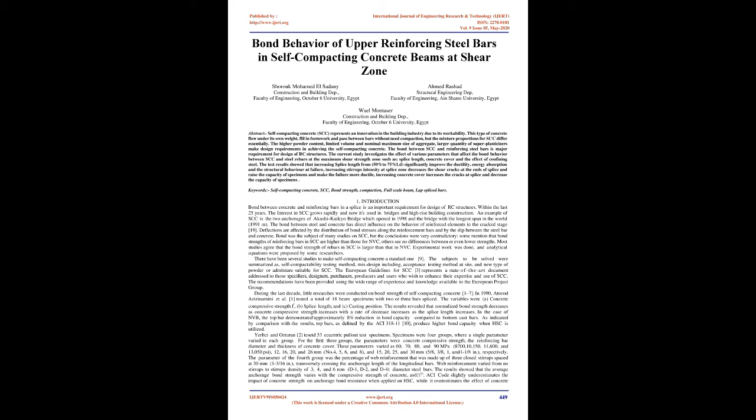The bond between steel and concrete has direct influence on the behavior of reinforced elements in the cracked stage. Deflections are affected by the distribution of bond stresses along the reinforcement bars and by the slip between the steel bar and concrete. Bond was the subject of many studies on SCC, but the conclusions were very contradictory.

Some mention that bond strengths of reinforcing bars in SCC are higher than those for NVC, others see no differences between or even lower strengths. Most studies agree that the bond strength of rebars in SCC is larger than that in NVC. Experimental work was done, and analytical equations were proposed by some researchers.

There have been several studies to make self-compacting concrete a standard. The subjects to be solved were summarized as self-compactability testing method, mix design including acceptance testing method at site, and new type of powder or admixture suitable for SCC.

The European Guidelines for SCC represent a state-of-the-art document addressed to those specifiers, designers, purchasers, producers, and users who wish to enhance their expertise and use of SCC. The recommendations have been provided using the wide range of experience and knowledge available to the European Project Group. During the last decade, little research was conducted on bond strength of self-compacting concrete.

In 1990, Azizinamini et al. tested a total of 18 beam specimens with 2 or 3 bars spliced. The variables were a. concrete compressive strength, b. splice length, and c. casting position. The results revealed that normalized bond strength decreases as concrete compressive strength increases, with the rate of decrease increasing as the splice length increases.

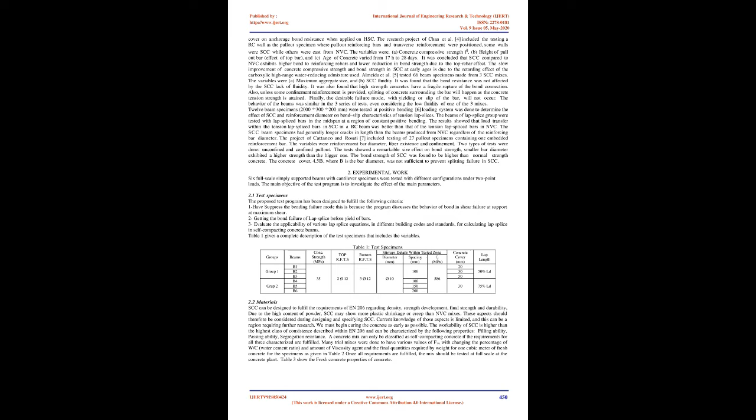In the case of NVB, the top bar demonstrated approximately 8% reduction in bond capacity compared to bottom cast bars. As indicated by comparison with the results, top bars, as defined by the ACI 318-11, produce higher bond capacity when HSC is utilized.

Yerlici and Ozturan tested 53 eccentric pull-out test specimens. Specimens were 4 groups, where a single parameter varied in each group. For the first 3 groups, the parameters were concrete compressive strength, the reinforcing bar diameter and thickness of concrete cover.

These parameters varied as 60, 70, 80, and 90 MPa (8700, 10150, 11600, and 13050 psi); 12, 16, 20, and 26 mm (number 4, 5, 6, and 8); and 15, 20, 25, and 30 mm (5/8, 3/4, 1, and 1-1/8 in), respectively.

The parameter of the fourth group was the percentage of web reinforcement that was made up of 3 closed stirrups spaced at 30 mm, 1-3/16 inches, transversely crossing the anchorage length of the longitudinal bars.

Web reinforcement varied from no stirrups to stirrups density of 3, 4, and 6 mm, D1, D2, and D4, diameter steel bars. The results showed that the average anchorage bond strength varies with the compressive strength of concrete, as f'c^2/3. ACI code slightly underestimates the impact of concrete strength on anchorage bond resistance when applied on HSC, while it overestimates the effect of concrete cover on anchorage bond resistance when applied on HSC.

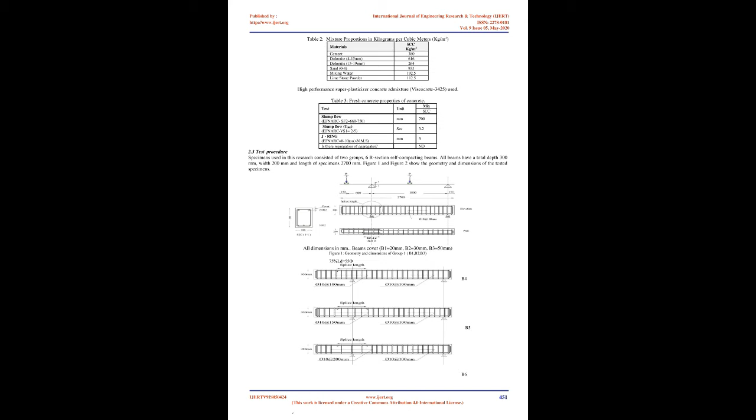The research project of Chan et al. included the testing of an RC wall as the pull-out specimen where pull-out reinforcing bars and transverse reinforcement were positioned. Some walls were SCC while others were cast from NVC. The variables were: a. concrete compressive strength f'c, b. height of pull-out bar, effect of top bar, and c. age of concrete, varied from 17 hours to 28 days.

It was concluded that SCC compared to NVC exhibits higher bond to reinforcing rebars and lower reduction in bond strength due to the top rebar effect. The slow improvement of concrete compressive strength and bond strength in SCC at early ages is due to the retarding effect of the carboxylic high-range water-reducing admixture used.

Almeida et al. 5 tested 66 beam specimens made from 3 SCC mixes. The variables were a. maximum aggregate size, and b. SCC fluidity. It was found that the bond resistance was not affected by the SCC lack of fluidity. It was also found that high-strength concretes have a fragile rupture of the bond connection.

Also, unless some confinement reinforcement is provided, splitting of concrete surrounding the bar will happen as the concrete tension strength is attained. Finally, the desirable failure mode, with yielding or slip of the bar, will not occur. The behavior of the beams was similar in the 3 series of tests, even considering the low fluidity of one of the 3 mixes.

12 beam specimens, 2000*300*200 mm, were tested at positive bending. 6 loading system was done to determine the effect of SCC and reinforcement diameter on bond slip characteristics of tension lap splices. The beams of lap splice group were tested with lap spliced bars in the midspan at a region of constant positive bending. The results showed that load transfer within the tension lap spliced bars in SCC in an RC beam was better than that of the tension lap spliced bars in NVC. The SCC beam specimens had generally longer cracks in length than the beams produced from NVC regardless of the reinforcing bar diameter.

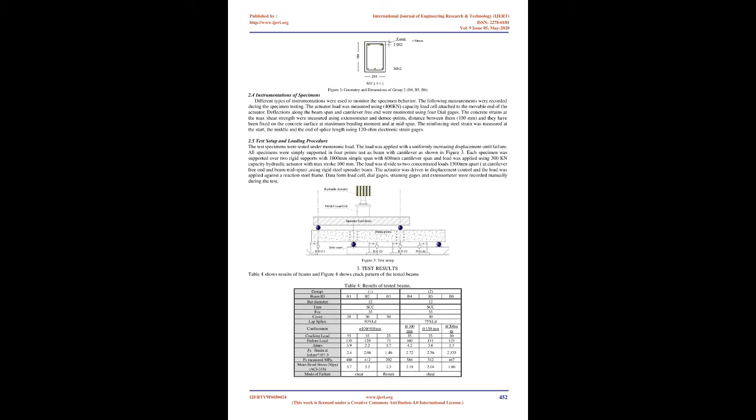The project of Cattaneo and Rosati 7 included testing of 27 pull-out specimens containing 1 embedded reinforcement bar. The variables were reinforcement bar diameter, rib existence and confinement. 2 types of tests were done, unconfined and confined pullout. The tests showed a remarkable size effect on bond strength. Smaller bar diameter exhibited a higher strength than the bigger one. The bond strength of SCC was found to be higher than normal strength concrete. The concrete cover, 4.5 db, where db is the bar diameter, was not sufficient to prevent splitting failure in SCC.

2. Experimental work. 6 full-scale simply supported beams with cantilever specimens were tested with different configurations under 2-point loads. The main objective of the test program is to investigate the effect of the main parameters. 2.1 Test specimens. The proposed test program has been designed to fulfill the following criteria. 1. Have suppressed the bending failure mode. This is because the program discusses the behavior of bond and shear failure at support at maximum shear.

2. Getting the bond failure of lap splice before yield of bars. 3. Evaluate the applicability of various lap splice equations, in different building codes and standards, for calculating lap splice in self-compacting concrete beams. Table 1 gives a complete description of the test specimens that includes the variables.

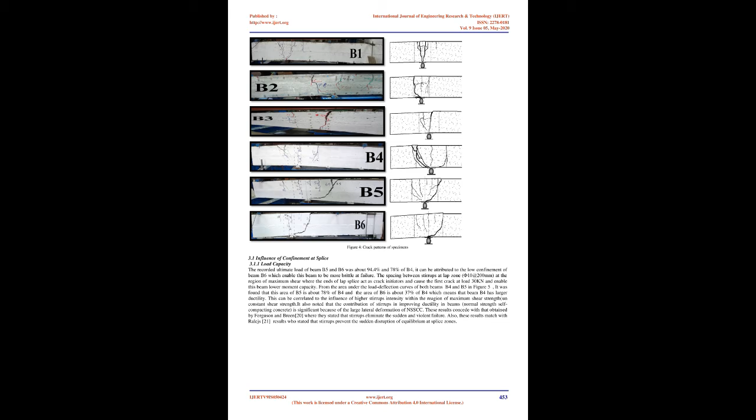2.2 Materials. SCC can be designed to fulfill the requirements of EN 206 regarding density, strength development, final strength, and durability. Due to the high content of powder, SCC may show more plastic shrinkage or creep than NVC mixes. These aspects should therefore be considered during designing and specifying SCC. Current knowledge of those aspects is limited, and this can be a region requiring further research. We must begin curing the concrete as early as possible.

The workability of SCC is higher than the highest class of consistence described within EN 206 and can be characterized by the following properties: filling ability, passing ability, segregation resistance. A concrete mix can only be classified as self-compacting concrete if the requirements for all three characteristics are fulfilled.

Many trial mixes were done to have various values of FCU by changing the percentage of W/C, water-cement ratio, and amount of viscosity agent, and the final quantities required by weight for 1 cubic meter of fresh concrete for the specimens are given in Table 2. Once all requirements are fulfilled, the mix should be tested at full scale at the concrete plant. Table 3 shows the fresh concrete properties of concrete.

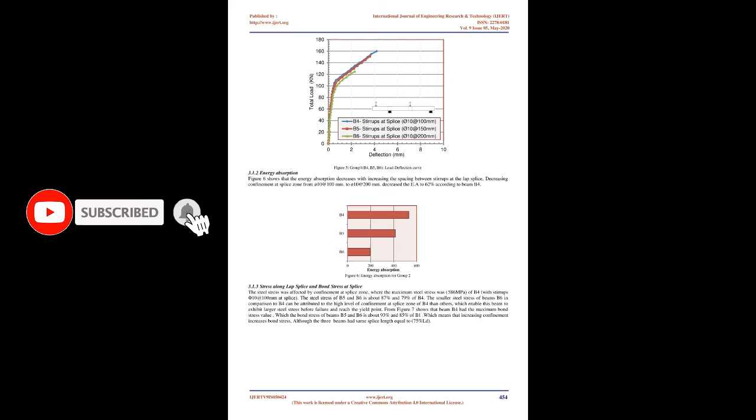2.3 Test Procedure. Specimens used in this research consisted of two groups, 6 R-section self-compacting beams. All beams have a total depth 300 mm, width 200 mm, and length of specimens 2700 mm. Figure 1 and Figure 2 show the geometry and dimensions of the tested specimens. All dimensions in millimeters. Beams cover: B1 equals 20 mm, B2 equals 30 mm, B3 equals 50 mm.

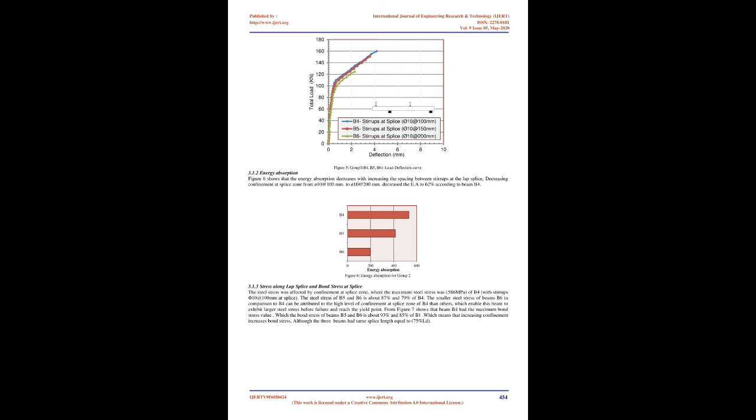2.4 Instrumentations of specimens. Different types of instrumentations were used to monitor the specimen behavior. The following measurements were recorded during the specimen testing. The actuator load was measured using a 400 kN capacity load cell attached to the movable end of the actuator. Deflections along the beam span and cantilever free end were monitored using 4 dial gauges. The concrete strains at the max shear strength were measured using extensometer and DEMEC points, distance between them 100 mm, and they have been fixed on the concrete surface at maximum bending moment and at mid-span.

The reinforcing steel strain was measured at the start, the middle, and the end of splice length using 120 ohm electronic strain gauges. 2.5 Test Setup and Loading Procedure. The test specimens were tested under monotonic load. The load was applied with a uniformly increasing displacement until failure. All specimens were simply supported in 4 points test as beam with cantilever as shown in Figure 3.

Each specimen was supported over 2 rigid supports with 1800 mm simple span with 600 mm cantilever span, and load was applied using a 300 kN capacity hydraulic actuator with max stroke 100 mm. The load was divided into 2 concentrated loads 1500 mm apart, at cantilever free end and beam midspan, using a rigid steel spreader beam. The actuator was driven in displacement control and the load was applied against a reaction steel frame. Data from load cell, dial gauges, strain gauges, and extensometer were recorded manually during the test.

3.1 Influence of confinement at splice. 3.1.1 Load capacity. The recorded ultimate load of beam B5 and B6 was about 94.4% and 78% of B4. It can be attributed to the low confinement of beam B6, which enabled this beam to be more brittle at failure. The spacing between stirrups at lap zone, Φ10 at 200 mm, at the region of maximum shear, where the ends of lap splice act as crack initiators, caused the first crack at load 30 kN and gave this beam lower moment capacity.

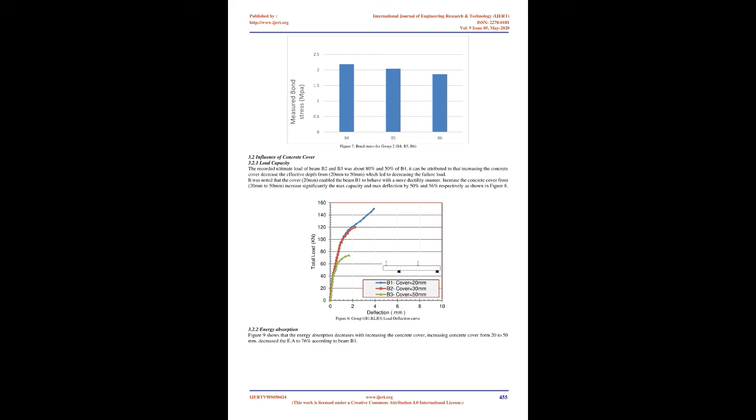From the area under the load deflection curves of both beams B4 and B5 in Figure 5, it was found that this area of B5 is about 78% of B4 and the area of B6 is about 37% of B4, which means that beam B4 has larger ductility. This can be correlated to the influence of higher stirrups intensity within the region of maximum shear strength, under constant shear strength. It was also noted that the contribution of stirrups in improving ductility in beams of normal strength self-compacting concrete is significant because of the large lateral deformation of NSSCC.

These results coincide with those obtained by Ferguson and Breen 20, where they stated that stirrups eliminate the sudden and violent failure. Also, these results match with Rashad's 21 results, who stated that stirrups prevent the sudden disruption of equilibrium at splice zones.

3.1.2 Energy absorption. Figure 6 shows that the energy absorption decreases with increasing the spacing between stirrups at the lap splice; decreasing confinement at splice zone from Φ10 at 100 mm to Φ10 at 200 mm decreased the EA to 62% relative to beam B4.

3.1.3 Stress along lap splice and bond stress at splice. The steel stress was affected by confinement at splice zone, where the maximum steel stress was 586 MPa of B4, with stirrups Φ10 at 100 mm at splice. The steel stress of B5 and B6 is about 87% and 79% of B4. The smaller steel stress of beams B6 in comparison to B4 can be attributed to the high level of confinement at splice zone of B4 than others, which enable this beam to exhibit larger steel stress before failure and reach

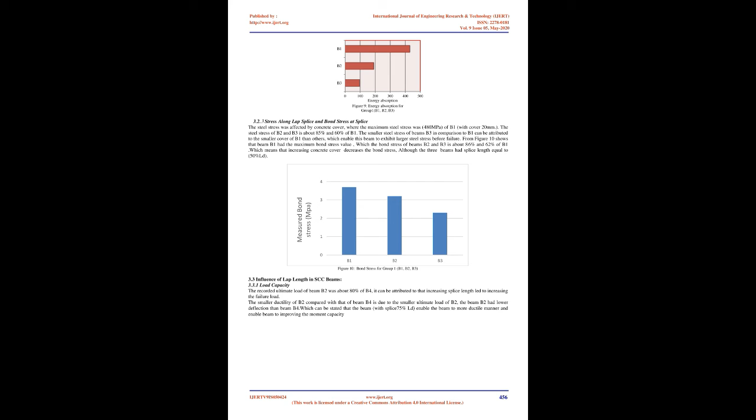3.2 Influence of concrete cover. 3.2.1 Load capacity. The recorded ultimate load of beam B2 and B3 was about 80% and 50% of B1. It can be attributed to that increasing the concrete cover decreased the effective depth from 20 mm to 50 mm, which led to decreasing the failure load. It was noted that the cover, 20 mm, enabled the beam B1 to behave in a more ductile manner. Increasing the concrete cover from 20 mm to 50 mm significantly increases the max capacity and max deflection by 50% and 56% respectively, as shown in figure 8.

3.2.2 Energy absorption. Figure 9 shows that the energy absorption decreases with increasing the concrete cover. Increasing concrete cover from 20 to 50 mm decreased the EA to 76% according to beam B1. Figure 9, Energy absorption for Group 1, B1, B2, B3.

3.2.3 Stress along lap splice and bond stress at splice. The steel stress was affected by concrete cover, where the maximum steel stress was 480 MPa of B1, with cover 20 mm. The steel stress of B2 and B3 is about 85% and 60% of B1. The smaller steel stress of beams B3 in comparison to B1 can be attributed to the smaller cover of B1 than others, which enable this beam to exhibit larger steel stress before failure.

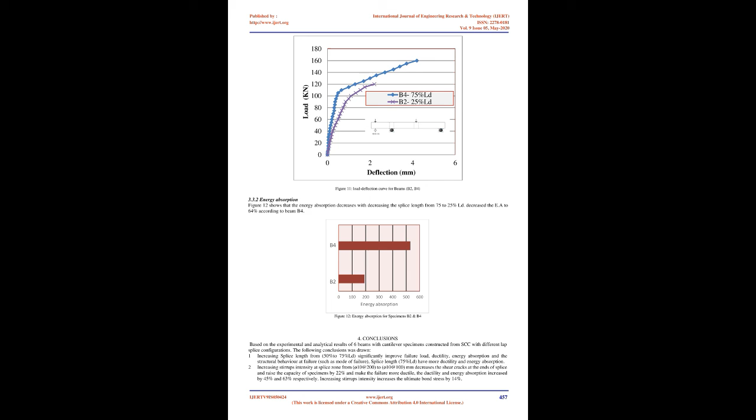3.3.1 Load capacity. The recorded ultimate load of beam B2 was about 80% of B4. It can be attributed to that increasing splice length led to increasing the failure load. The smaller ductility of B2 compared with that of beam B4 is due to the smaller ultimate load of B2. The beam B2 had lower deflection than beam B4. Which can be stated that the splice of 75% LD enables the beam to behave in a more ductile manner and improves the moment capacity.

3.3.2 Energy absorption. Figure 12 shows that the energy absorption decreases with decreasing the splice length from 75 to 25%. This decreased the EA to 64% according to beam B4. 4 Conclusions. Based on the experimental and analytical results of 6 beams with cantilever specimens constructed from SCC with different lap splice configurations, the following conclusions were drawn.

1. Increasing splice length from 50% to 75% LD significantly improves failure load, ductility, energy absorption, and the structural behavior at failure, such as mode of failure. Splice length 75% LD has more ductility and energy absorption.

2. Increasing stirrups intensity at splice zone from Φ10 at 200 to Φ10 at 100 mm decreases the shear cracks at the ends of splice and raises the capacity of specimens by 22% and makes the failure more ductile. The ductility and energy absorption increased by 45% and 63% respectively. Increasing stirrups intensity increases the ultimate bond stress by 14%.